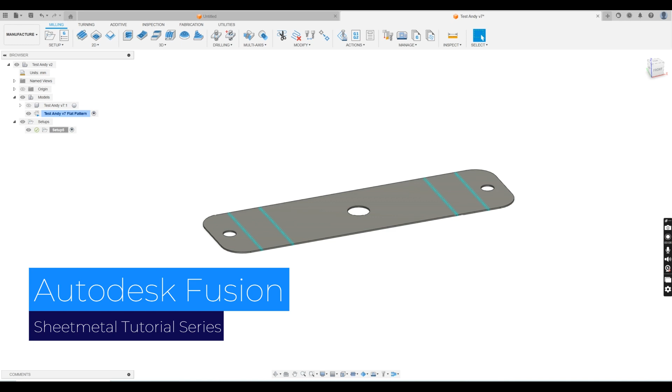In this video we're going to show you how to add a drilling operation, a scribing operation and a plasma operation all to the one part. So it's just bringing together the last three videos.

Things to note when you're doing this: you always want to start out with your drilling operations. So let's say you've got a full sheet of material on the machine, we want to do all our drilling and all our scribing, and then at the end we want to plasma cut out the parts. We want to always add our drilling operations first.

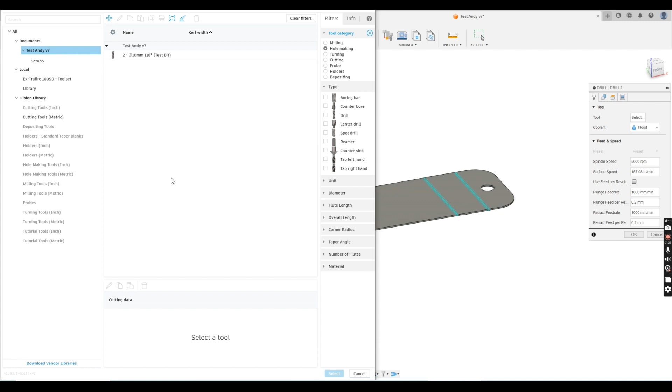So you want to go to our milling tab. If you're on your fabrication tab, jump over to your milling tab. Add a drill operation, so we're going to select drill. We want to select our tool. In the previous video I explained how the tools work, but for this example we're just going to select this tool here. We're going to hit select, and then select our geometry. I want to drill this hole here and this hole here. I'm also going to change the height so that it drills through the material. I'm going to hit OK, and that drilling operation is complete.

I'm going to rename this drill. So the operation is renamed drill.

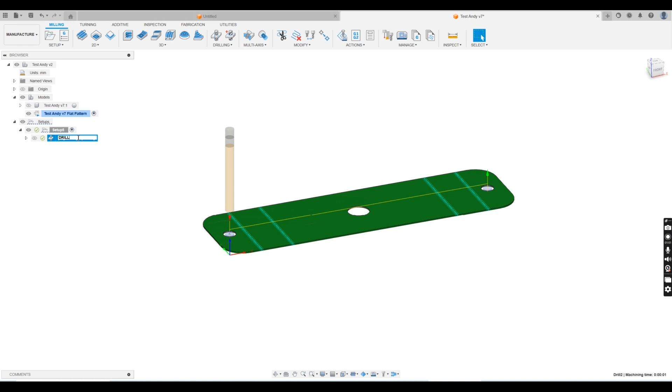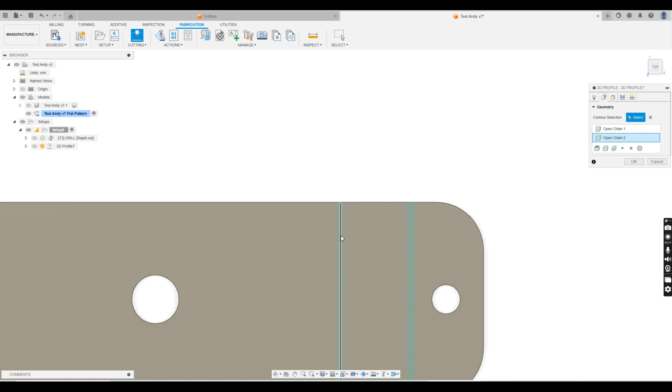Next thing I want to do is add a scribe operation. So to add a scribe operation, we're going to jump back to our fabrication tab. We're going to hit 2D profile operation. I'm going to change this to etch, and now we're going to select the bend lines, which is what we want to etch. So I'm going to hit bend line here, bend line here, bend line here, and bend line here. So we've got all our bend lines selected, and now we hit OK.

It's going to prompt and look for a tool. This isn't critical, but I'm going to just keep it the same as our plasma tool for simplicity. So now you can see our etching operation is created. I'm going to rename this to etch.

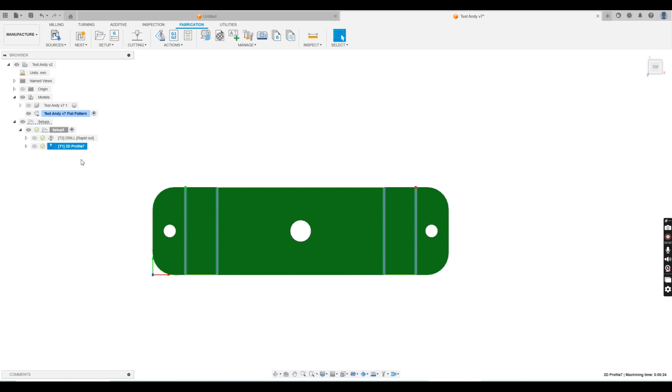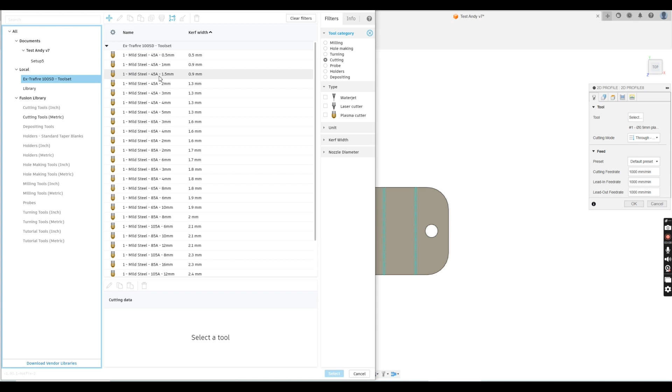Finally what I want to do is cut out this part on the outside and also this hole here. So once again add a 2D profile operation. This time we want to leave cutting mode through, and we're going to select our tool. We're going to jump onto our plasma tool library, into the material, thickness and torch consumable that we're using.

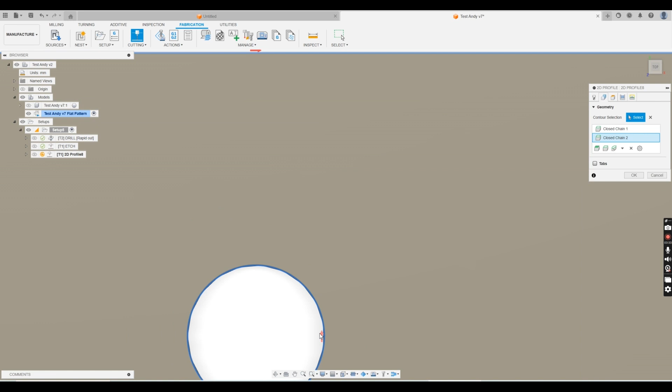Hit select, and basically now what we want to do is select our geometries. So what I want to do here is select this geometry here and also this geometry here. I'm going to look at it from the top. I want to make sure my arrows are on the outsides, which they are, and the insides on here, so that will work fine, and hit OK. I'm going to change the name of this operation to plasma.

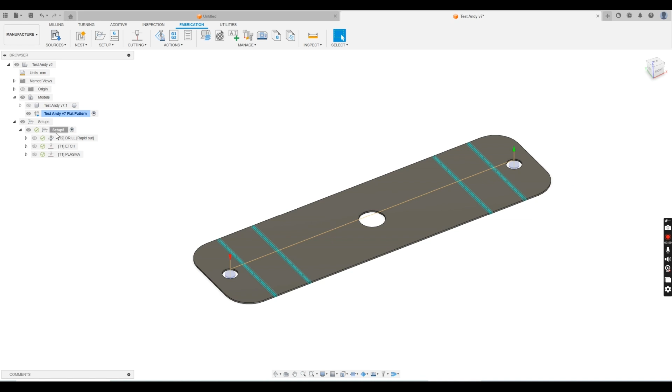So we've got three operations created, and basically if we want to output the whole lot of the operations in one file, you make sure your setup is selected, and then you hit the post-process button here and rename your file. So, test file, and hit post. You can see now it's successfully posted, and you can see on our file that we've got a drilling operation first.

It goes through the drilling operation, we've got an etching operation, and then at the end we've got a plasma operation. So this file is the same file that you load up on the CNC machine and you can run.

Just things to note here: if, for example, you had the drilling completed and you just wanted to output the etching and the plasma, you can do that in a very simple way. Instead of selecting your setup and exporting or creating a post process, what we can do instead is just select whatever operations you want to output.

So if I want to select plasma, for example, and hit post process and go through the steps, basically it'll output just the plasma. So for example, if I hit post process, I'll just call this test 1, 2, 3, 4, hit post. Now the file that is output is just the plasma section of that previous file. I hope that makes sense.

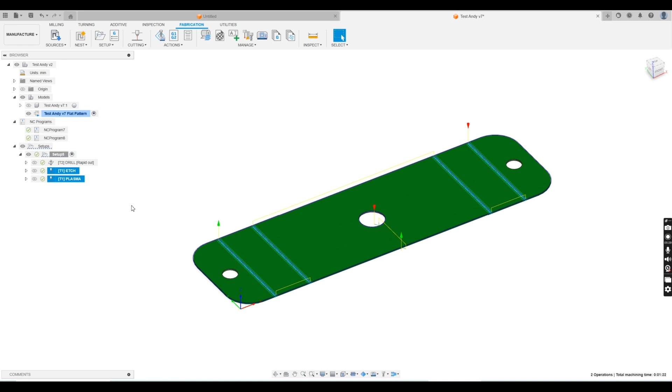If you want to select multiple of these operations at one time, but not the top one for example, we just hit plasma, hold the control key, and we can hit another one. So we can select as many as we like there. To deselect, just hold the control key and select whichever one you want to deselect.

Just to give you a look at a simulation of this: if we have the setup selected, we can hit simulate, and I'm going to just leave the machine simulate what we've just programmed. So it's doing our two drilling operations, and then it picks up the etching head. It's going to do the 4 etch lines, and then at the very end it picks up the plasma head, and it's going to profile the part as we asked it to do.